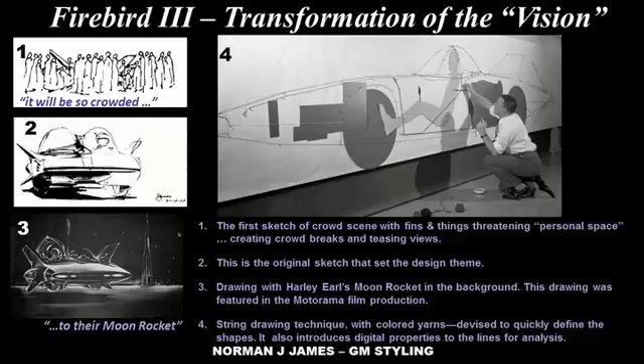Following Earl's bullets, the first sketch was of a crowd scene. Theme sketches followed to the moon, and a string drawing technique was developed, giving mathematical properties to the line.

Encouraged by the results, our boss, Bob McLean, approved a new mock-up to the theme. Contrary to conventional practice, it was built as a Pratt Institute Rowena Reed style of 3D space sketch.

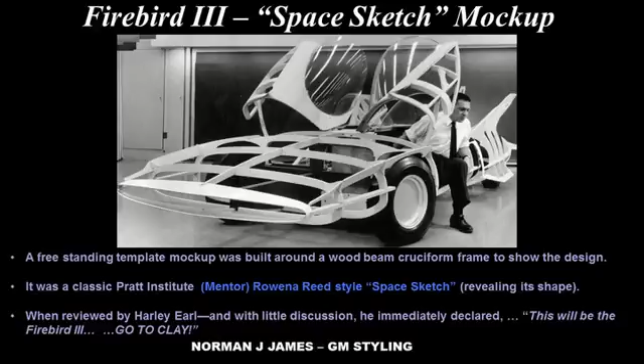When reviewed later by Harley Earl, it was immediately bought off with, 'This will be the Firebird III,' and then, 'Go to Clay.' For approximately a year and a half, the design was executed and resolved to be ready for

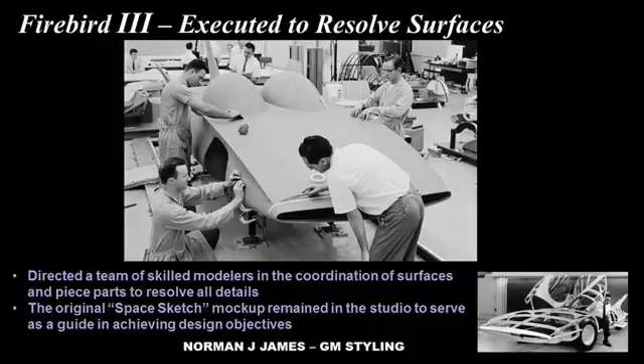the 1959 Motorama. The original space sketch remained in our studio the entire time as a guide to achieving our visual objective. This overview shows the key personnel and their tasks.

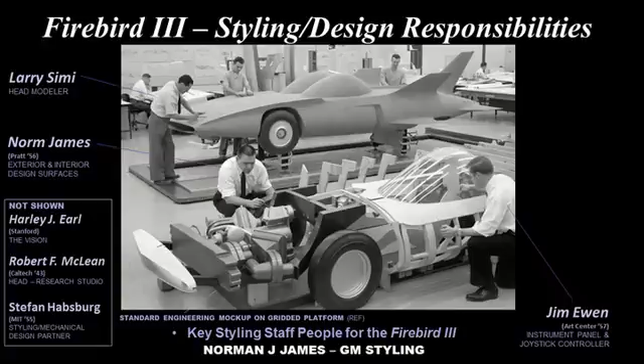There was some wind down after Firebird III and in the transition to Bill Mitchell's ascendancy as head of styling, with investigations into different vehicle architectures.

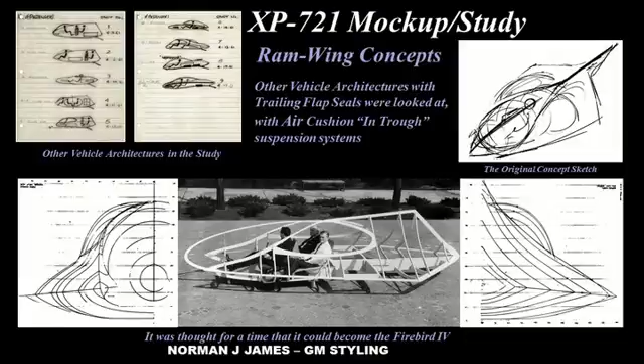In this XP 721 Ramwing concept, I explored an opportunity that came up and accepted a transfer to the GM Defense Research Laboratories in Santa Barbara.

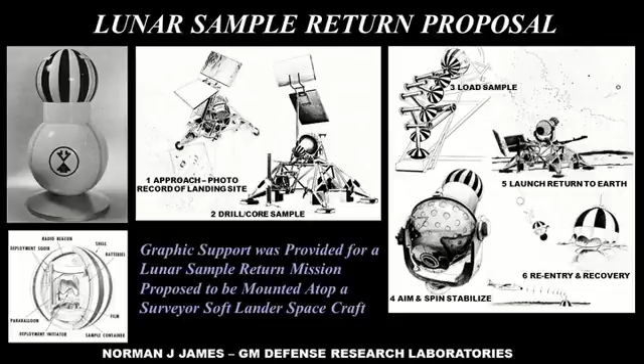The most noticeable change outside the obvious content of the work was in the conversion to a proposal nature of mostly black and white graphics supporting customer-centered marketing efforts.

Interesting in the presentation of proposals was the adaptation of graphic styles and techniques uniquely applied to special circumstances. Also shown in the upper right is a support exercise assisting GM R&D computer graphics programmers in the early CAD days.

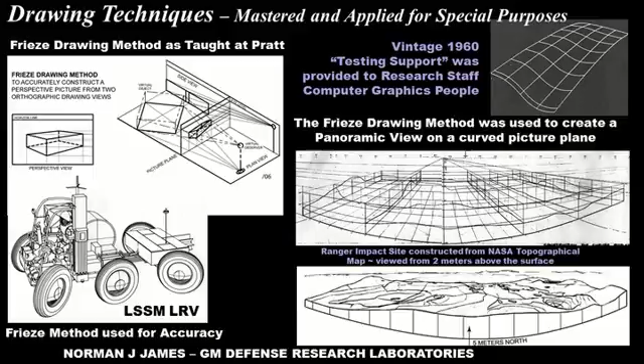These figures are intended to show that in the earliest days very little was known of the lunar surface for sizing vehicle systems of any type.

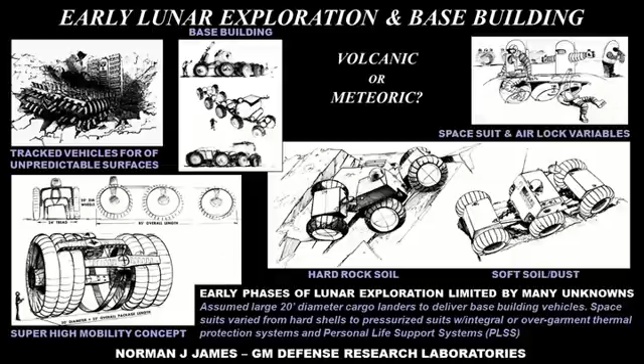The biggest question was whether soil properties were mostly volcanic or meteoric in nature. A concern by Professor Tom Gold of Cornell was that the surface may be a fairy castle dust in structure held together by static electricity only, and that vehicles would sink deep into the dust and be lost.

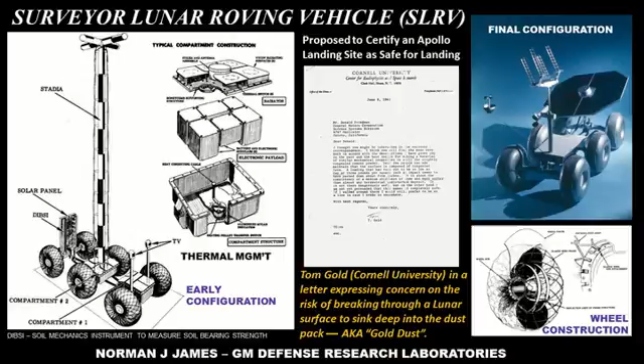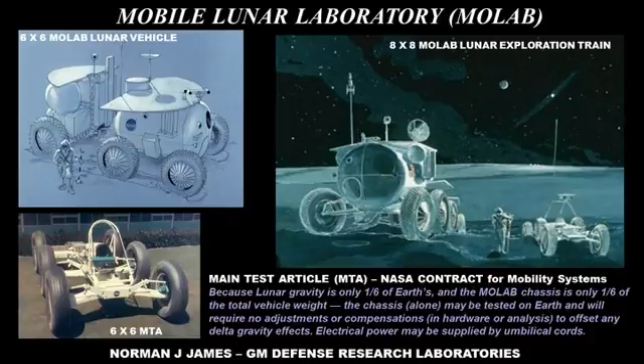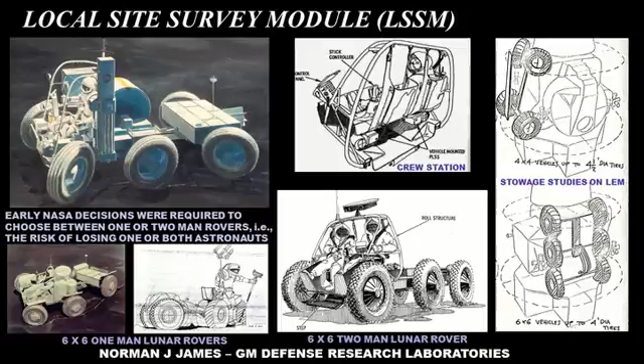Before we went further with large vehicles, our attention returned to support Apollo. The most pressing issues were whether rovers should be one-man or two-man. That is, do we want to risk losing one or both astronauts?

I left GM before they won the contract to build the rovers. Shown here is the lunar rover with its key people.

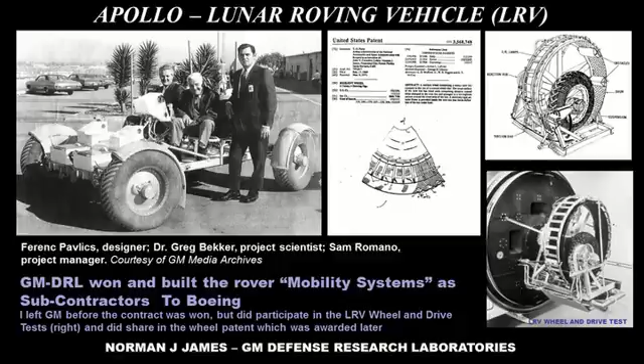To the right is a wheel and drive test that I supported while I was still there, and the wheel patent that was shared by several of them.

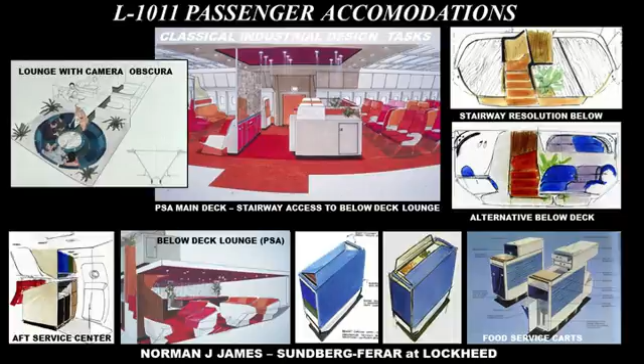I left GM to join Sundberg-Ferar in Burbank, California to work on the Lockheed L-1011. This overview shows a diversity of the industrial design tasks for passenger accommodations that were covered for the various customers.

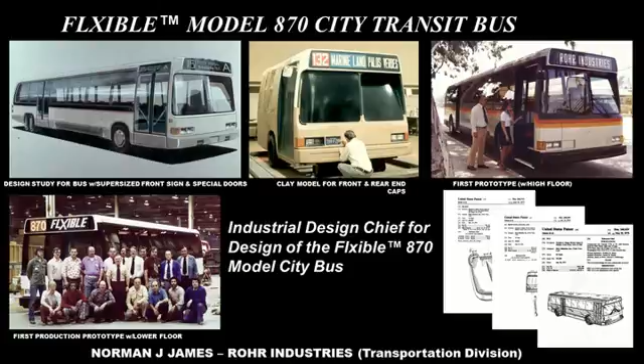With completion of the L-1011 contract, I left Sundberg-Ferar to join Rohr Industries, deeply involved in mass transportation, having bought the Flxible Bus Company in Ohio and setting up its transportation division in Chula Vista, California, with its own industrial design department. These photos show various stages of the program.

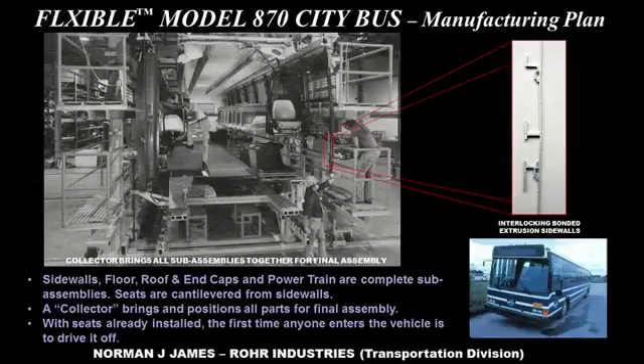Rohr sold the bus factory and the program to Grumman, and I was transferred to the Marine Division to build the 3K-SES. This was a U.S. Navy 3,000-ton surface effect ship that would ride on a cushion of air to speeds up to 90 knots.

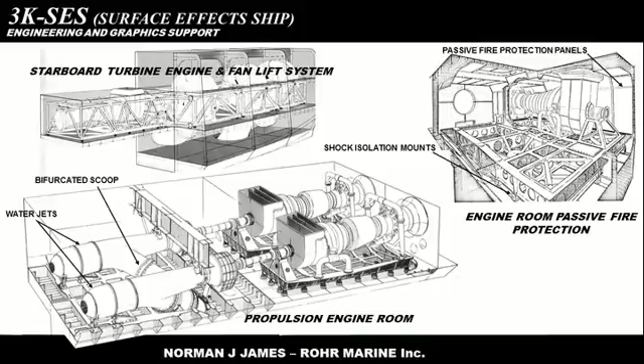In M&P, I would support design of passive fire protection on the aluminum ship and work on noise and vibration suppression foundation. The Carter administration canceled the program when it came into office, and Rohr sold the company to its employees. I went with them, taking my seniority with me.

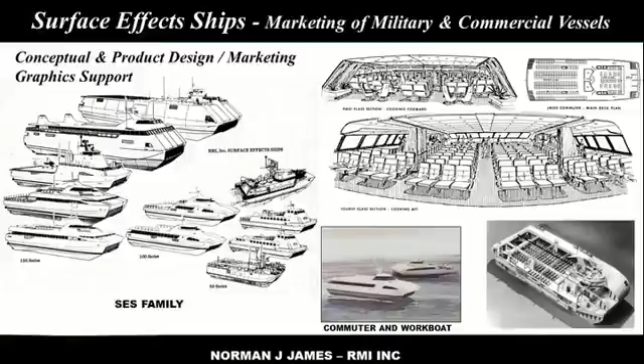As RMI, we went after worldwide markets, and most of my work was in graphics and marketing support. Having purchased the shipyard, RMI built a swath craft on speculation.

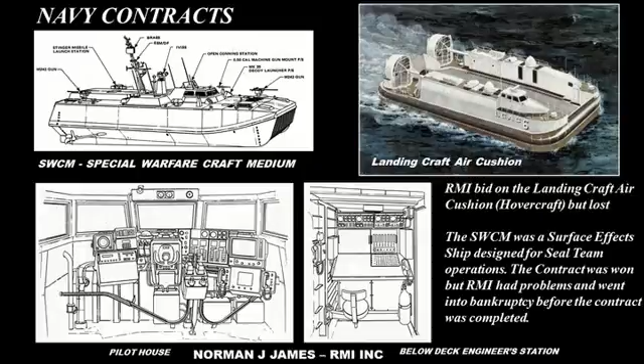We bid on LCAC, Landing Craft Air Cushion, a hovercraft, which we lost, and a Special Warfare Craft medium, SWCM, for SEAL team operations, which we won and started building. Unfortunately, RMI ran into problems and went into bankruptcy before it was completed.

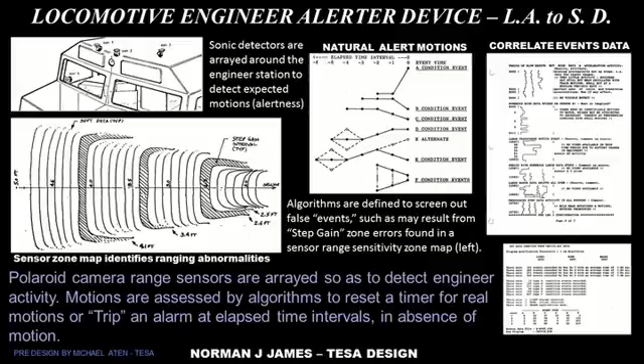I also submitted a proposal based on my telescope patent as a principal investigator to conduct a proof of concept test to validate waterborne observatories using gyroscopic devices for tracking. It was not approved for follow-on.

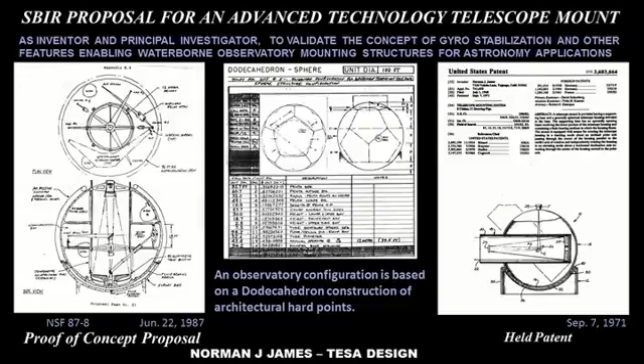Returned to the Rohr Aircraft Division as a new employee as Group Engineer of Design to Cost, leading a value engineering team for cost reduction of engine nacelle inlet, fan cowl, and thrust reverser system.

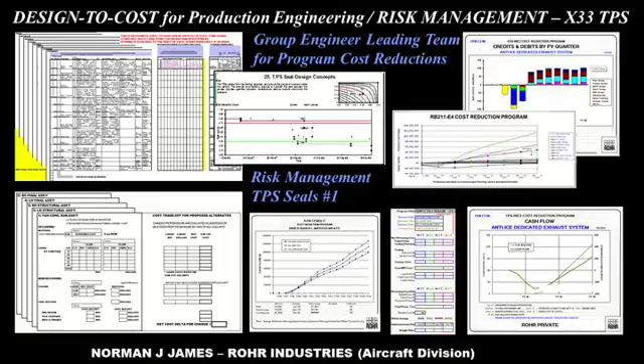In a secondary assignment, I performed to report risk management for Rohr on thermal protection issues on the Lockheed Martin team for the X-33. The Rohr X-33 was also supported with concepts for design and manufacture of thermal protection aero surfaces as shown here, titanium sandwich structures for less critical topside surfaces.

Seals were the highest risk items of the thermal protection system.

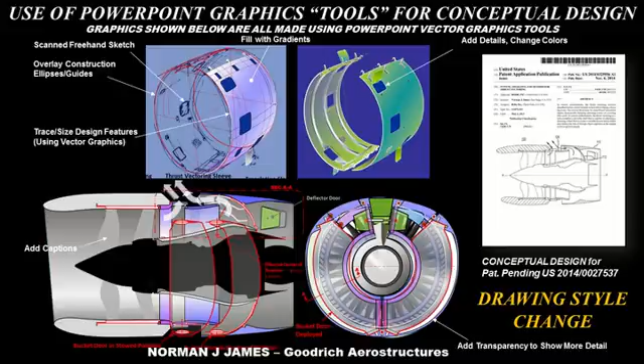This illustration calls attention to a graphics change in drawing techniques with the establishment of PowerPoint as a universal corporate communications tool. PowerPoint contains its own graphic tools, and conventional drawing techniques have been abandoned to almost exclusively utilize the PowerPoint medium. This slide demonstrates those PowerPoint techniques as applied for conceptual designs.

In the cases shown, concepts for patents already published and now in public domain are shown with their conceptual design as they were submitted. Otherwise, this is a list of my patents awarded or pending.

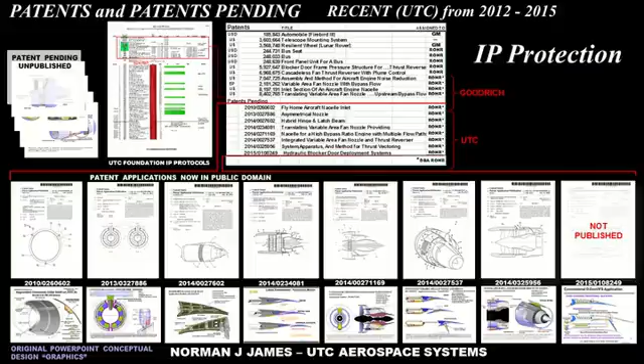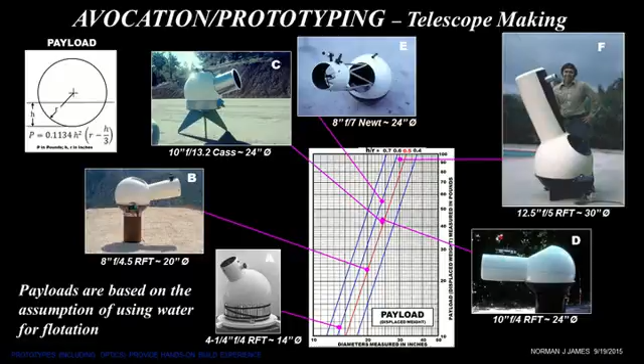Following issuance of my patent, experiences gained in telescope making, tooling, and especially the hands-on lessons of advanced prototyping played heavily to the benefit of my day job values added.

In March of 2015, I received a Career Achievement Award from Pratt Institute at the University Club in Manhattan. Ironically, only a few blocks from where my career began with a showing of the Firebird II at the 1956 Motorama in the Waldorf Astoria main ballroom.